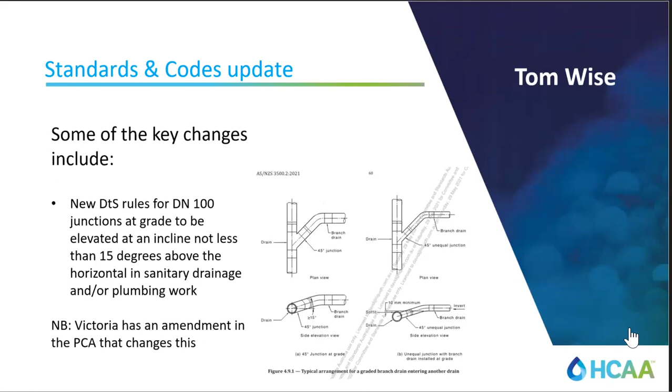So what was this one? So this talks to the fact that the 2021 deemed to satisfy are now in. And one of the major changes in ground is that there's an informative section that talks to soil classifications as we move into class 1 buildings in reactive P class and H1 type soils. And so there's a good bit of guidance there as to what a suitable installation looks like. But of course, make sure the hydrogeotech or the geotech is involved in those designs.

To account for bushfire prone areas as we build in more unique locations, the bushfire standard has now been referenced under each section of the PCA. The performance-based design and installation must now meet the ABCB guidelines. So instead of just producing a performance-based report now, there's a consultation process that needs to occur, which is a simple paper where you just identify the stakeholders and the reasoning for the performance-based solution, circulate that, wait for a little while, and then issue the report.

So if you're using performance-based solutions for stormwater drainage systems, the PCA people will be onto that, but I'm not too sure how long it'll take Fair Trading to catch up. So mark you as well, on our website at the moment the consultation document isn't there, but we might get a template up fairly shortly.

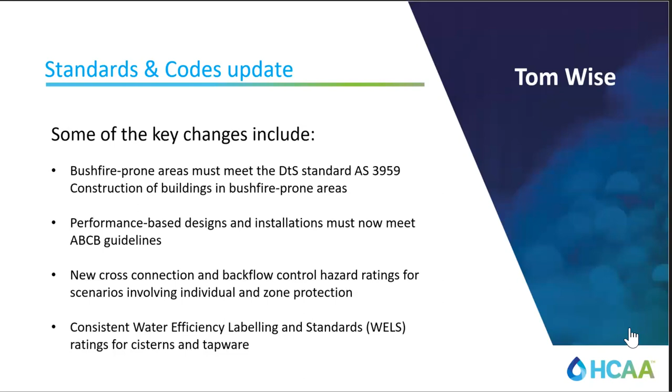Cross connections, so there's now a new risk rating method. Backflow has been made a matter of public interest, so elevated from the deemed to satisfy into the PCA. So there's probably process changes, but maybe the outcome isn't exactly what it might have been before. So then, of course, WELS labelling schemes and that type of stuff as well. So of course, plumbing works needs to comply with the BCA and PCA. And then, of course, 1st of May.

So generically across Australia's states and territories, if you've already obtained a building approval or CC, that has already set the PCA for your project. But of course, check which one is applicable. And of course, variations to buildings and designs add some terrible complexities to that. For Victoria, there's a few different things that they've added in to suit their local conditions. One of them is making changes to the 15-degree junction, and of course that sits at the back of the PCA in relation to state and territory variations.

So, like Paul said, it should be easy to find the PCA on the Building Codes website. It costs nothing. You can download a PDF which doesn't go green, which is very pleasant to use. And hopefully that was a helpful summary.

Has anyone got any comments or want to discuss any issues that they discovered, or is everyone okay? Cool. Good, we'll keep moving on.

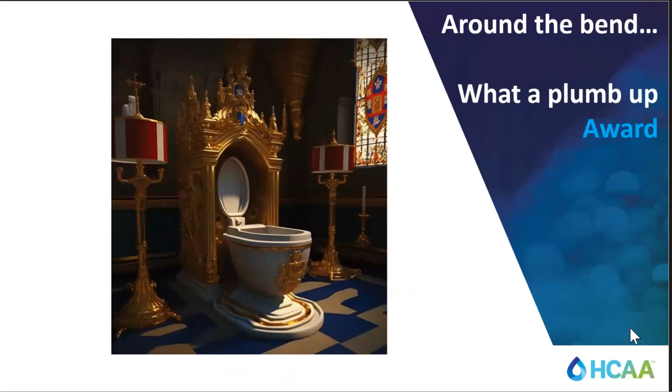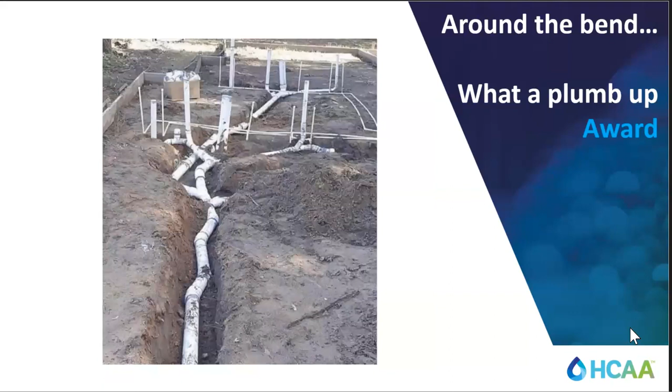Alrighty, we're on to the funny pictures. So we put this one up, obviously because of the coronation recently, but it's the main throne there. What do you make of that? Look at that for a sec. What can you see there, or what can't you see there? No ball, yeah, correct. What can you see in that one? Yeah, exactly. That's pretty nifty, what do you think?

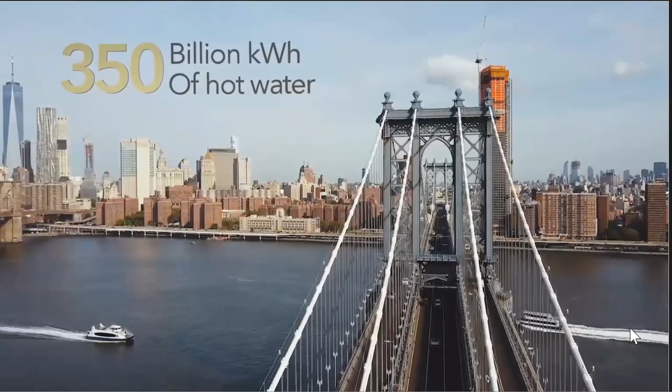In the world, every year, a total of 938 trillion liters of sewage heated at 16 degrees Celsius is discarded into our waters. In the United States, 350 billion kilowatt hours worth of hot water is discarded annually. This is enough energy to melt 3.77 billion tons of ice, the same weight as 11,000 Empire State Buildings. When ocean temperatures rise, surface water can more easily dissipate into vapor, creating the potential for more frequent and stronger tropical storms. Warmer temperatures will also lead to the melting of the polar ice sheets, causing sea levels to rise and damaging coastal communities and habitats.

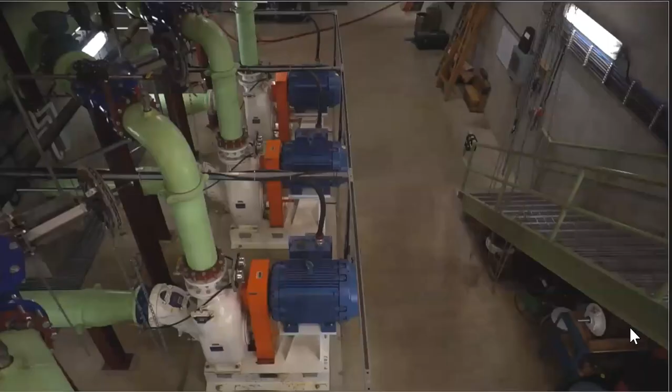There's a tidal wave right now of trying to live more sustainable lives by recapturing heat from wastewater. Innovative, creative people are putting together how we can become sustainable cities, reducing greenhouse gas emissions, changing the kind of energy we're used to using in the last century. All around the world, cities and countries are developing ways to reduce their thermal energy footprint and harness the power of wastewater. In Vancouver, Canada, each day, about 100 million gallons of wastewater flows through the facility at the Southeast False Creek Neighbourhood Energy Utility. The plant uses thermal energy captured from wastewater to provide heat and hot water to the community. When we first started it up in 2010, we served about one...

We'll just stop that there. Basically what we're going to talk about here is this equipment I'm working with the guys in Canada on trying to bring into Australia. The company is called SHARC Energy, and my company here is called Hydraulic Solutions by Design. So I'm here to complement you guys, not to compete with you guys. I'm here to help you guys to bring this renewable energy into Australia. So if you need any help, don't hesitate to contact me. I'm on the LinkedIn group with HCAA.

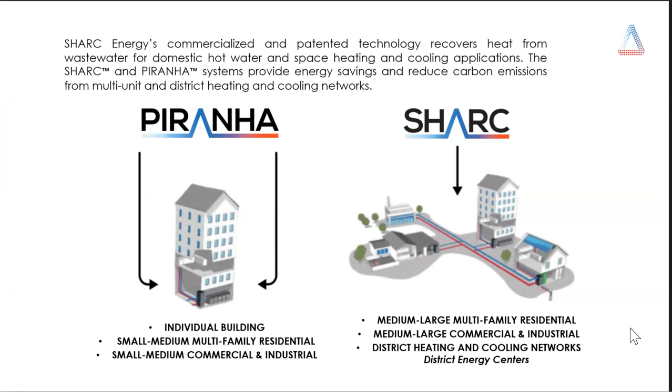The product basically does district thermal energy applications, which is the SHARC, which I'm working on at the moment in some projects in Canberra, and also does buildings on their own, which is the Piranha, which can do hot water systems for the buildings on their own. So just running through this quickly, that's the Piranha. We've got one of those in Canberra at the moment at a nursing home, aged care facility. It picks up the sewer from 200 independent living units and an aged care facility, and it basically collects the wastewater, grabs the heat out of the wastewater and preheats the cold water to create hot water. 80% reduction in energy and about a 3-year payback in return on investment.

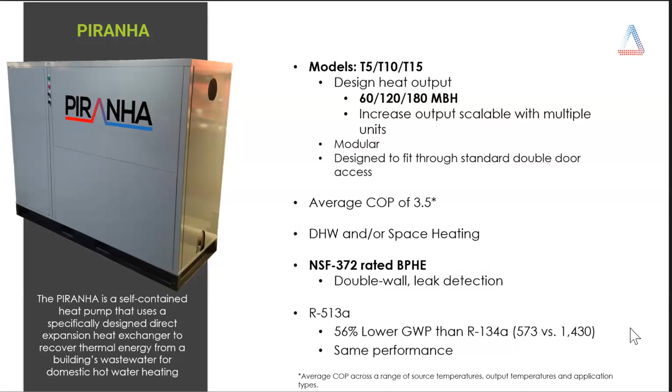I won't go through all these in detail. That's how they work. Emily might be able to have them there ready to give you later if you need them. And then we have the SHARC, which is used for industrial, commercial and larger precinct sites.

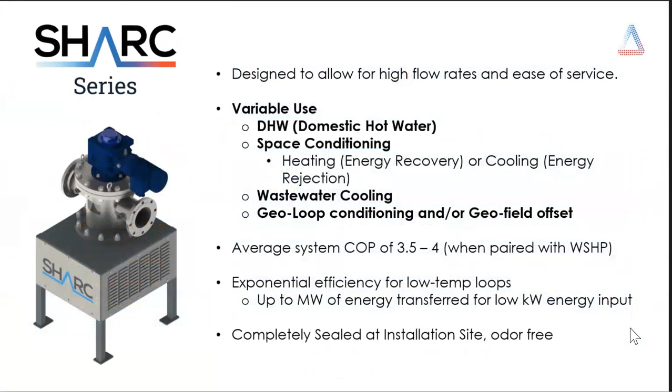Which basically filters the sewer down to a fine 3mm size, goes through a heat exchanger, and then we're doing one in Canberra with 1,000 dwellings where we're sending 20-degree ambient water in the whole precinct, and that is basically providing us with hot water via water-to-water heat pumps that are provided by Stiebel Eltron, and we use the Rheem tanks for preheat water. So it's basically like a geothermal heat source, but we don't have to put a bore field in.

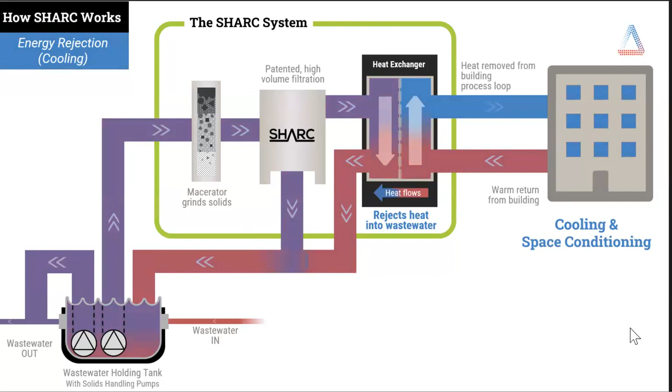So I won't go through all those slides, but you can actually add a bore field into it if you need to add more or less energy.

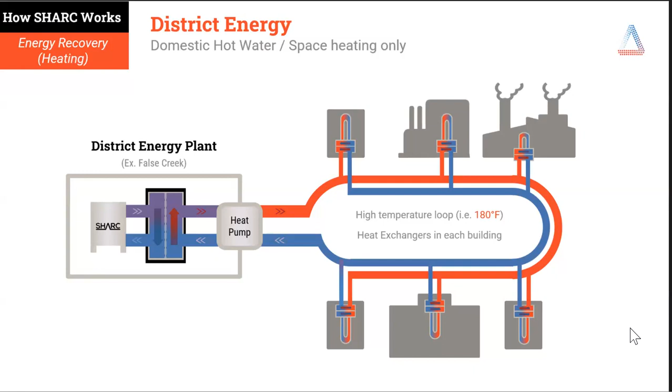That's a great example of innovation. I'm going to skip through some slides, so bear with me for a sec. But it's not a new technology, is it, Brad? It's been on the go for a long time in Europe and in the US and Canada.

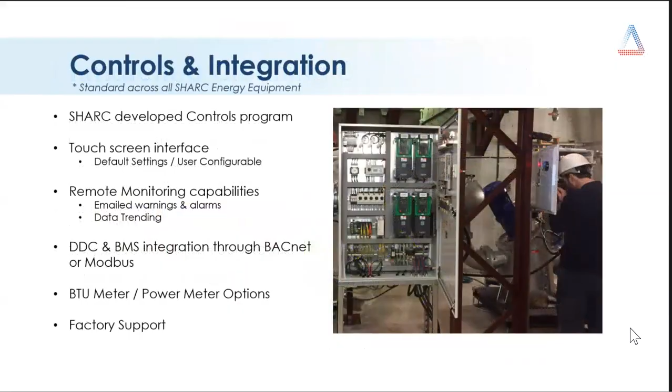There we go. Last slide. Happy days. Okay. We're on to our Aaron Cortese, who's going to do a wee presentation on the material that you're seeing here. So please welcome Aaron.

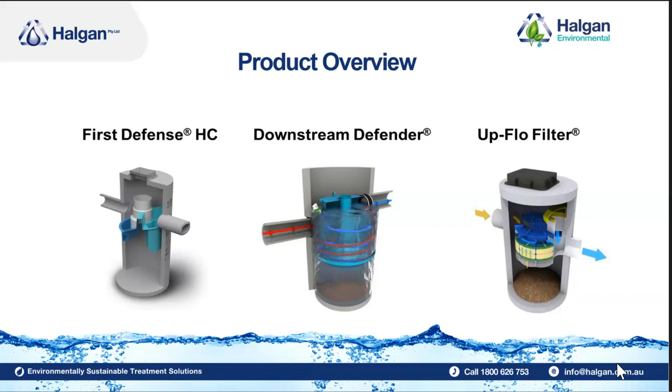So keeping with the traditions of Halgan's products, Halgan manufactures in polyethylene and HDPE. So while some of these products around the world might be featured in concrete vessels or fiberglass, we're going the lightweight option of manufacturing them in PE or HDPE. So essentially it's Hydro International's technology in our vessels.

So these could be in all different configurations. They could be vertical vessels or horizontal, depending on the application. And in some cases, which we can touch on at your leisure, they can be installed in larger OSD applications as well. So without mentioning some of our competitor friends, you may be used to some of these cartridge systems, where you might have OSD vessels with multiple cartridges. We'd be using this Up-Flo treatment system, as you can see there. Not sure how I'm going for time there, but we'll.

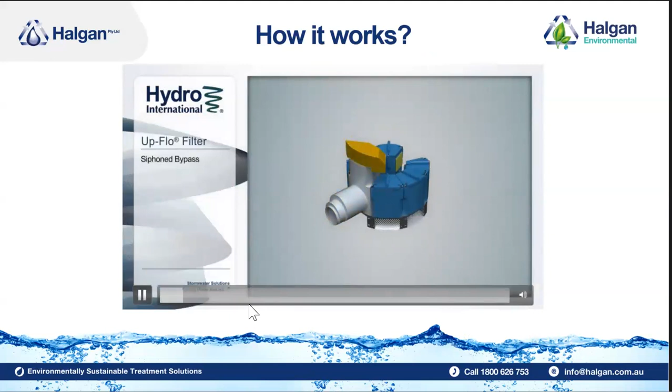Okay, so depending on the catchment size and whatnot is depending what model is proposed. So again, the catchment size, pipe sizes, flow rates, and more particularly, council's water quality objectives would dictate what type of vessel is used there or how many segments. So

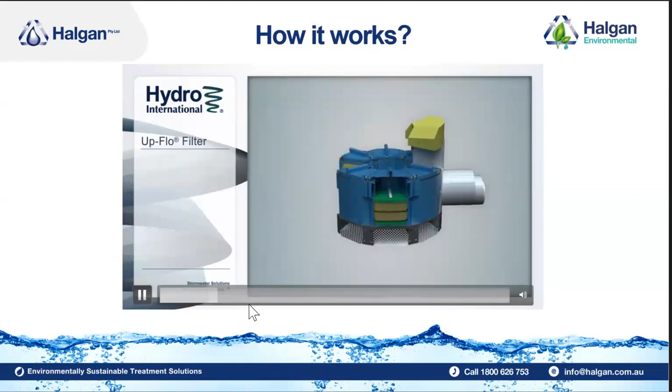As you can see there, similar to the product that's over here, that is the Halgan upflow filter, or the HUF as we like to call it. Each one of those modules treats 1.6 litres a second. So again, depending on what the catchment requirements are or council's objectives are, would suggest how many filter modules might be on in that particular device.

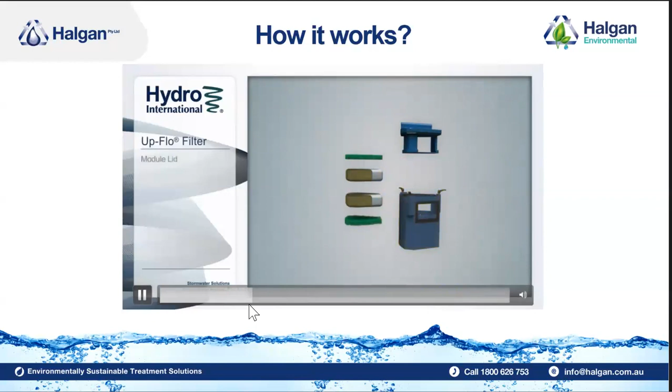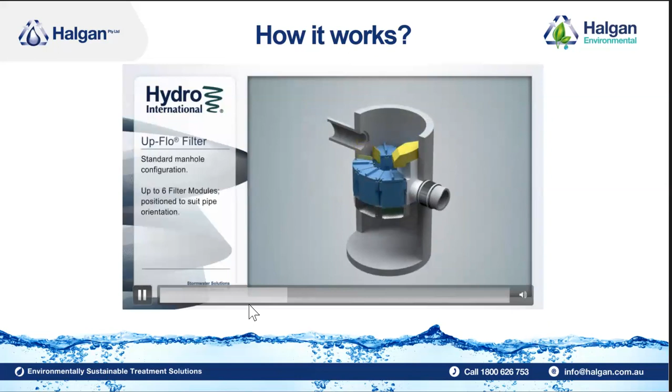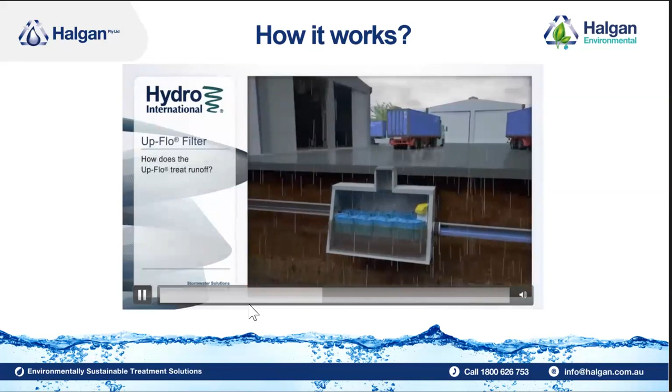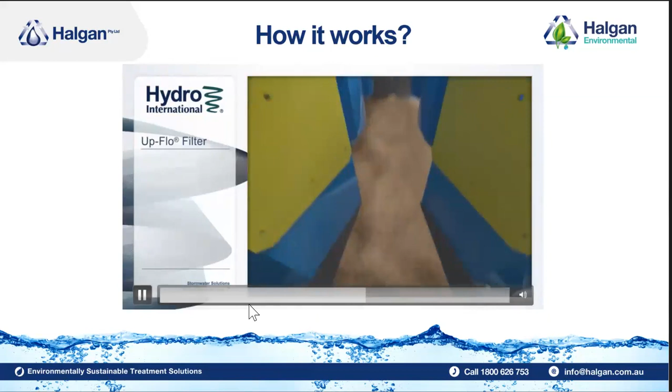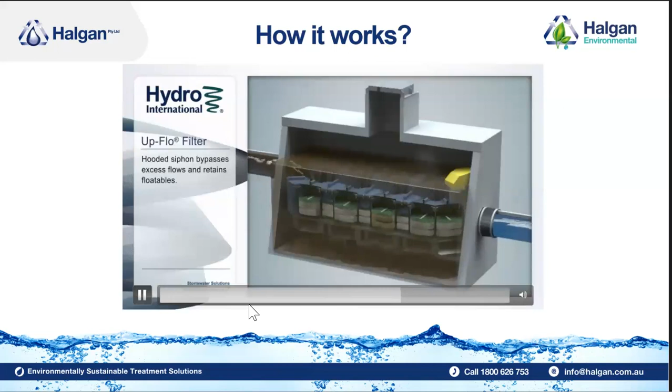So again, what's the suitable application for this? Well, with most developments, we understand that council, and we agree with as well, there'd be opportunities where they'd be trying to use what I would call green infrastructure, so biobasins, sediment basins, etc. But of course, subject to the spatial requirements, they might not be possible. In which case, having one of these vessels under the ground can treat with the same sort of capabilities without impacting the spatial areas where, again, it's valuable real estate. So it's horses for courses, and in many applications that I see, you might have biobasins, tree pits, and you'd also have gross pollutant traps or upflow filters such as these.

I'm probably getting pretty close to my time already, but I'll carry on until I get the wind up.

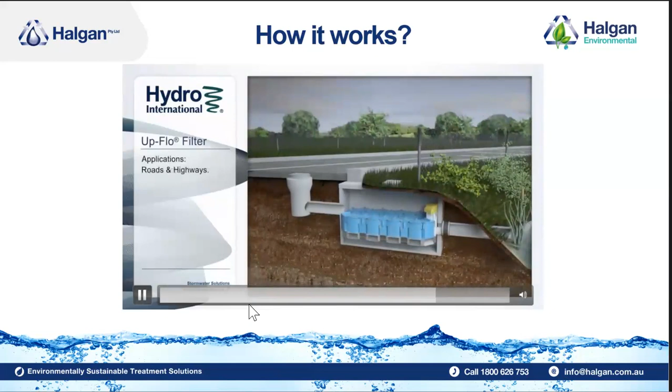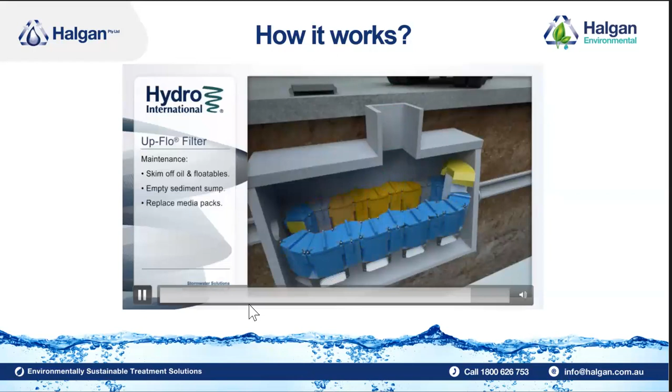So look, maintenance with these is similar to most, whereas the added advantage of this, which I think you're about to see here now, is it's maintained from the surface periodically by vacuum trucks. And then as required, on average every 2 years, those filter packs would be exchanged. So a lot easier on the back than most. Those media cartridges are essentially about 15 kilos wet, as opposed to some of the bigger cartridges you might be familiar with.

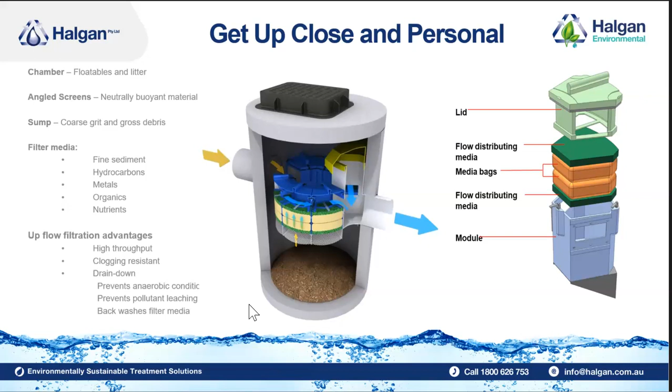So look, without dragging on too much, feel free to get up close and personal a little bit later on. We can have a chat about that particular product in general. There's several others that we can also discuss as well. And if you can't remember the name of the product, like Paul didn't quite remember my name, that's fine as well. So our product's the HUFF, but if you forget my beautiful face, well, you can always remember his. Thanks very much.

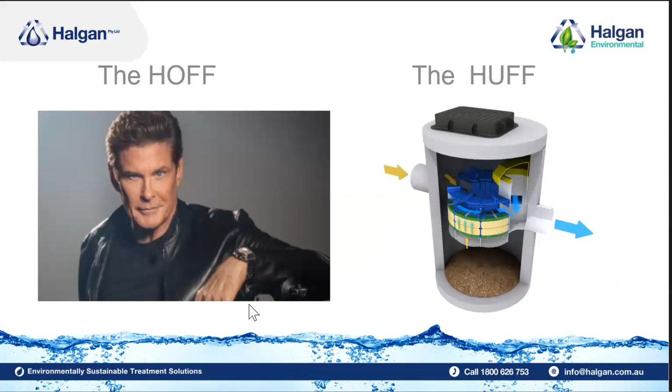Fantastic, well done, mate. No expense spared on the videos as well, eh? Really cool. Well done. And thanks for taking the liberty to bring all these pieces of equipment as well. Alrighty, so you have a question?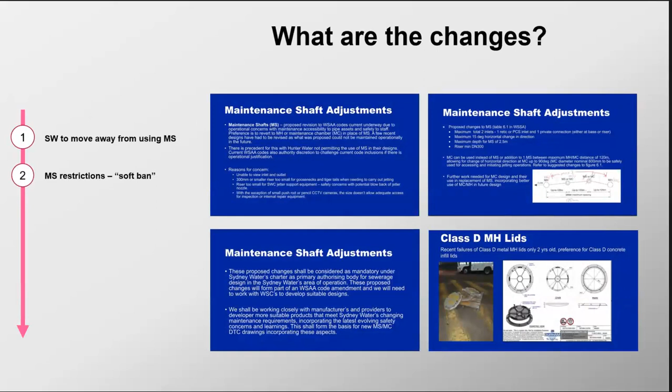They will be moving towards maintenance chambers. That's a 600 mil chamber. And that's in place of a maintenance shaft and actually in place of maintenance holes in some instances. The spacing has been tweaked a little bit as well, without going into too much detail about that. And also they're looking to maybe change the type of covers that are being used as well.

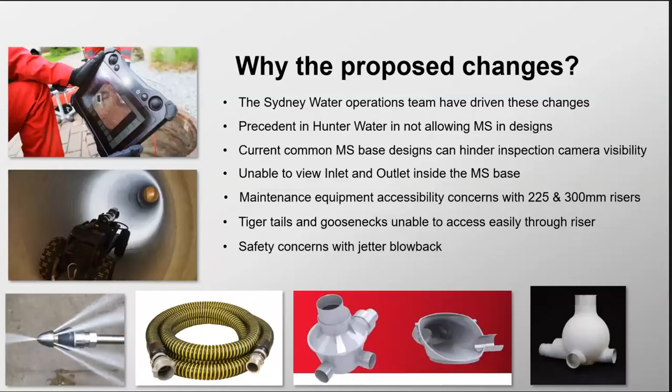So, which brings us to the range, the Awashaft range, and you can see we've got a family of structures there. Starting with our DN1000 maintenance hole. And you can see here we've got preset base types. Now, this is a departure away from the traditional systems, which are either cast in situ or have set angles that can be called upon to be made.

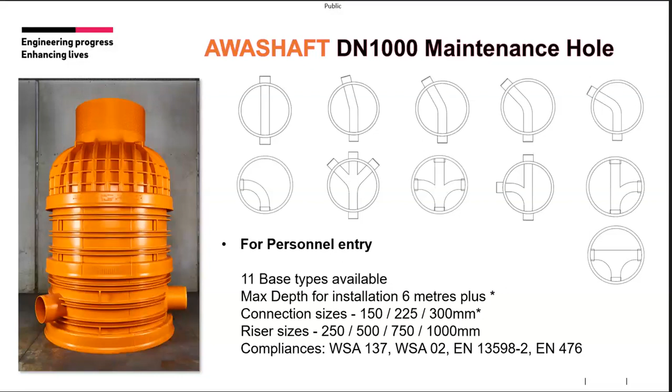We have a hybrid 800, which is in between the maintenance chamber and the 1000. Now, this is a pretty cool concept that we have for relining a degraded gas-attacked maintenance hole. So that's designed to re-sleeve and permanently reline a maintenance hole, a 1000 maintenance hole. The voids between the new parts and the old chamber would be filled with a quickset cement. I won't bore you with too many slides on that, but it's one to keep in mind for reline renovation.

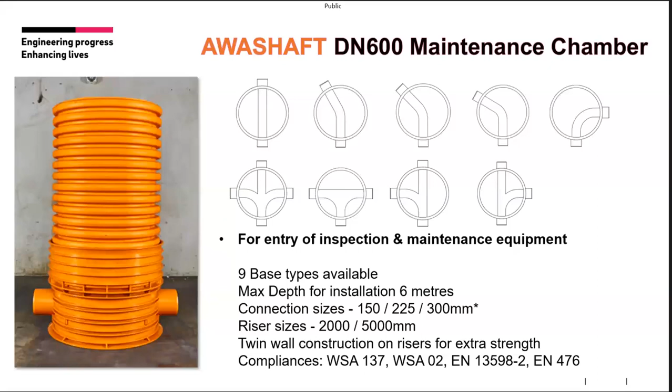600 maintenance chamber. This is the one that's making some pretty big appearances now in the Sydney Water network. I've been attending quite a few installations. I have also been lucky enough to do a lot of the plans and talking to a lot of consultants about these. I've learned a lot in the last few months about what they're capable of and how they work. And a lot of the contractors as well have been on a bit of a learning curve with these. So as you can see there, 9 preset base types, and we've got a couple of riser sizes, but I'll get into a little bit of that as we move on.

Our poor forgotten child there, the maintenance shaft is probably going to go the way of the dinosaur now. The junction one specifically; the straight through could still be used up to 2.5 meters deep and up to 15 degrees deflection. But in Sydney Water, those junction bases are now fairly well obsolete. We also do a TMS, obviously, for where the line terminates.

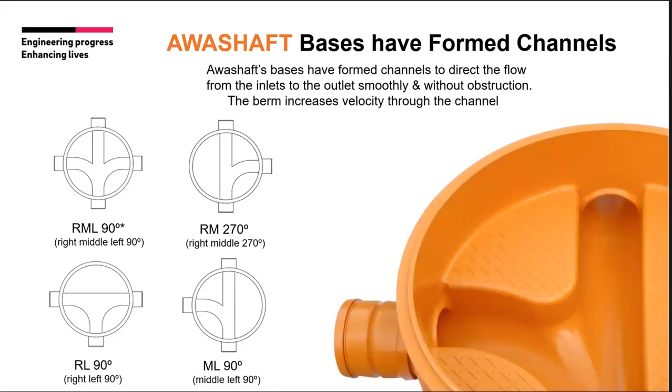So our shafts have formed channels, as you can see. It's interesting to note there's a berm there between the channels, and that's there to help increase the velocity, similar to a Venturi, I suppose, and hydraulically, they work very well. We have 0% fall in our bases, which is also quite a big departure away from traditional maintenance holes, which have 30 to 50 mils fall in them. And the concrete structures need that because of their porous and grabby nature, whereas ours are more or less Teflon coated, if you like.

So what happens if you need an angle that's not exactly what we have in the product book? Well, we've got a bit of an ace up our sleeve with the ball joints. We're not the only ones on the market that have this concept, but ours is sort of an optional add-on that we can put on. You don't necessarily have to use them. But if you've got incoming grades or horizontal deflections, those ball joints can allow for 7.5 degrees horizontal deflection and up to 13% grades up or down. So it gives plenty of variation.

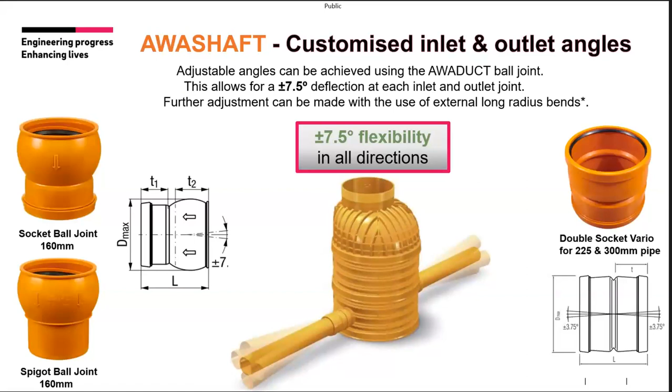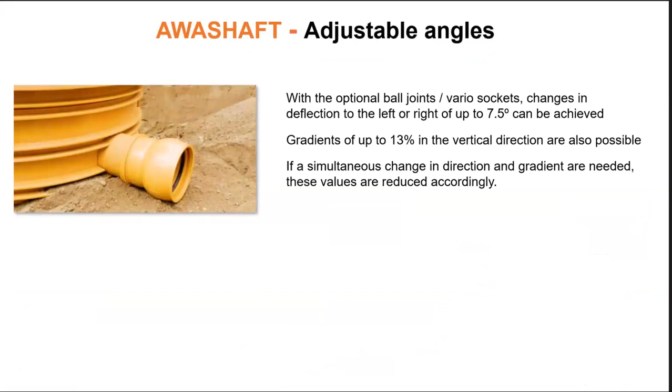So you'll notice on the maintenance holes, we had straight through 15, 30, 45, 60, and so on. Those ball joints allow you to catch any angle infinitely in between those. That's pretty much how it works. You can see there that the bedding's been set down, the base is in place, the socketed ball joint on there, and the pipe deflecting away. I do have a sample on the table if you wanted to have a bit of a play with that. And you can see there the outgoing grade.

So it allows for plenty of flexibility, and the contractors, although a little bit baffled initially how they were going to make it work, as soon as they had a go with it, they were quite impressed with the amount of flexibility, because every trench you open is going to be a bit of a Pandora's box. You don't know what you're going to find.

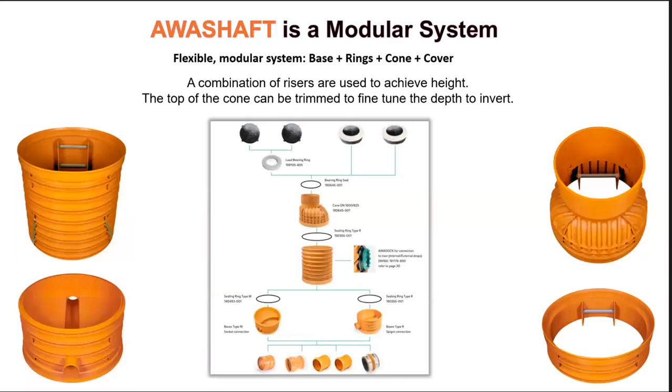So it is a modular system. As you can see there, base, risers in different configurations, and the cone. So it's rubber ring jointed, and these are designed to be completely watertight and set for 100 years once you've got those in. Also, at the top of that cone, that area there can be cut up to 250 mils. So you can get really fine adjustments there before your concrete lid's placed on top.

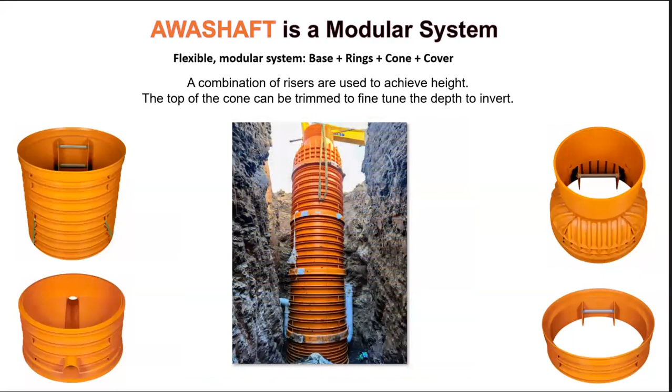And that there's a 4.5 metre installation up in the Hunter region. We've been operating pretty successfully up there for about 5 years, Steve, maybe 5 years in Hunter Water. So we're doing really well in the subdivision space up there. You can see how the components work.

Same with the 600, it's probably even a little bit more simple. Base, riser and cover: select your base type, 2 or 5 metre riser, which is then cut by hand, could be a hand saw, reciprocating saw, something to that effect. And then just a B or D class cover. So it's a bit of a Lego set, if I was going to simplify it. All rubber ring jointed, no welding, no gluing. So it's a real flexible and fast system.

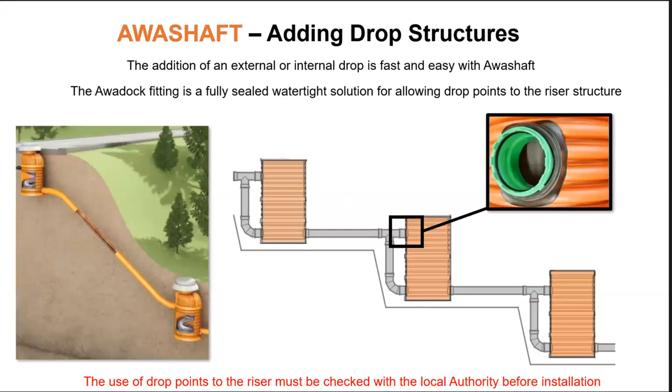If you've got external drops coming in, high level drops, we do have a solution for that as well. Obviously, it's a bit of a simplified photo there, but we have a fitting called the Awadock. And with that, you can simply core a hole in the side of your riser and add that rubber seal, and then simply screw in the green fitting. That can be anywhere on that vertical axis. It may be an external drop or an internal drop. We can do both. So you can see here, that's basically how the fitting looks.

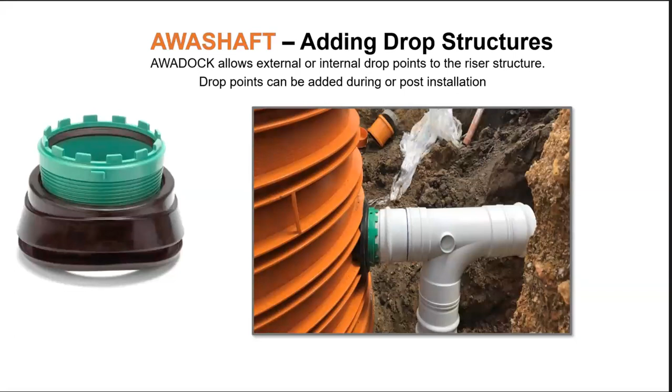And again, I do have the fittings on the table, so I encourage you to have a bit of a look. Some simple tools, just a 200 mil hole saw for this particular fitting, and a clock face wrench, which is used to wind that conical fitting into that rubber seal. There you can see the drop junction and the external drop headed down to that inlet at the base. And that was again from one of our installers up there in Newcastle, sporting a lovely Rehau hat. And you can see the external drop, and you can see the utilisation of ball joints there as well. And for the 600, you could potentially have multiple incoming drops as well, anywhere along that vertical axis.

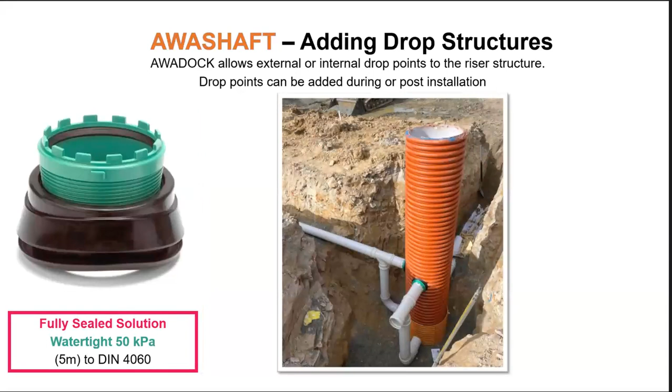So AWASHAFT is 100% permanently leak proof. It's brilliantly engineered in the way that seal is encased and caged in that polypropylene housing. So what that means is that the seals are completely load independent, so that the rubber seals never get stressed like you would see in a traditional setup.

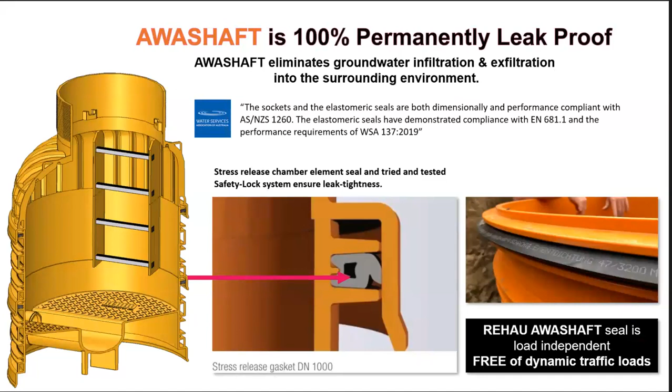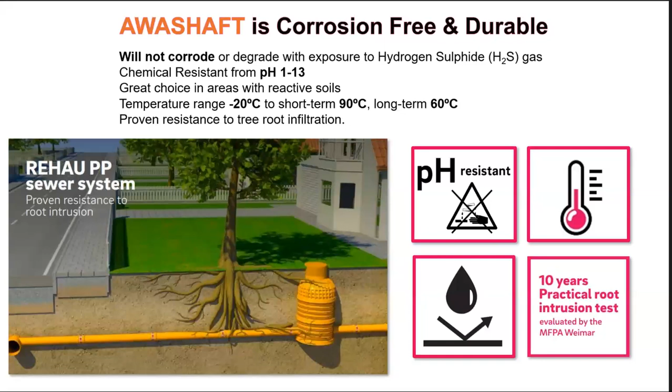The material itself, polypropylene, lends itself really well into these systems because it is highly resistant to chemical attack. pH 1 to pH 13 is a pretty amazing range. Temperature resistance there, pretty good as well. And compared to the traditional concrete structures, it's pretty well impervious to the H2S gases that we see. And if you have areas with reactive soils, and there's plenty of that around the state, then obviously this is a pretty good choice as well.

So one of the questions we get all the time is, well, is it plastic? Is it going to float away? Because we all know that trying to push a beach ball down into water will result in it smacking you in the face, otherwise known as the Archimedes principle. There you go, Matt, I used it again.

But the way we combat that is with the correct compaction, and it holds onto those horizontal ribs and it's effectively locked into place. So you can install an AWASHAFT in 5 metres of groundwater from the pipe invert upwards without any dramas at all. No concrete base needed, no encasement, no stabilised sand. You can use it if you really feel that way inclined, but it's not a requirement.

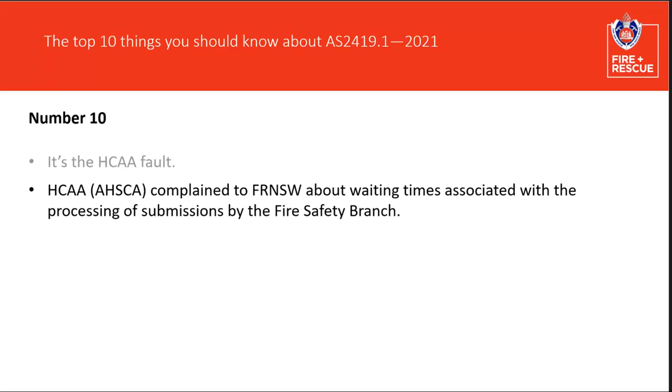What I've learned over the long period of time I've now sat on a standard: as soon as you write a rule, you create other problems. So we've probably still got the same problems, but we've tried to solve a lot of the problems associated with 2005. So that was number 10. So it gets more exciting from here. All right. On number 10 continued, sorry. I just like saying that. It's the HCAA's fault, all right? I just loved it. And the following 9 top points are, it's the AHSCA's fault. All right. Okay.

Number 9, some early concerns from the Hydraulics Consultants Association of Australia. So Em sent me some questions. So I put them up there. My comments are in red. So someone said, do all the jobs with boosters require a private or fire service pumping appliance to come and do pressure and flow testing of the system, or are there other options?

I said, commissioning requirements have to be complied with, and they were supposed to be complied with in 2005. Probably weren't, but how this is achieved is up to the design team. If you can get someone to prove your design meets all your performance requirements, 20 litres a second at the hydraulically most disadvantaged hydrant, that's up to you. Fire and Rescue New South Wales do not undertake commissioning tests, so we can't get dragged into it. And the basic reason for that is they don't want to risk the legal obligations of blowing up systems.

Where a booster is installed, the system is to be boosted. It's one of the fundamental requirements in the back of the book. So there's an expectation from the fire services that the thing is tested and water's flowed through it and the hydraulically most disadvantaged hydrant performs in some way. And you get all that stuff in section 12 and the appendices S, T, and U.

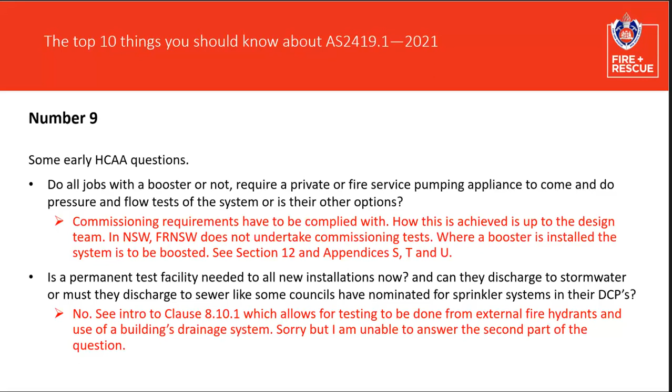Is that what DCP is? Well, whoever the person is asking, he's saying that some development control plans nominate the sprinkler systems to discharge to a sewer. So if it's a development control plan and it's not written that a hydrant system has to discharge to the sewer, then you probably don't have to, because sprinklers have got the black water stuff. There was some case law around these things.

Oh, can you hear? There's people on the Teams as well.

I'll repeat that. Discharging either of those, you're looking at 20 litres a second most of the time. Where's that going to discharge to? I'm saying, most of the time you have a sewer pump station. Sorry, you can't discharge more than 2 litres a second from a sewer pump station to city water. I understand that, Mark, that's fine. I'm not answering. All I'm saying is, we're trying to figure this one out.

So everyone knows, well, I've got 4 minutes, and this was just a primer. All right, I'm not here till 12 o'clock.

If it's a tank that isn't the primary water supply, a break tank, you don't have to put a large bore suction connection to it, because the break tank will be served by an H pattern or inline or tank model booster assembly, and that will allow the fire service to get to the primary water supply, which in this instance would be a town main. So the break tank's been installed because the authority having jurisdiction, the water agency, says your pumps can't draw off the town main. So you put a break tank on, we don't want access to it, because we can get access to the primary water supply, the town main, because of the hydrant system.

So the key point is you as a designer have to say what's the primary water supply, and that's the supply that's going to give the system 4 hours of supply. If it's a town main, fine. If it's a tank, we need a large bore suction connection. So first point. For buildings greater than 50 metres, as above, except where an H pattern or similar booster assembly is provided, then the town main can provide the required flow rate.

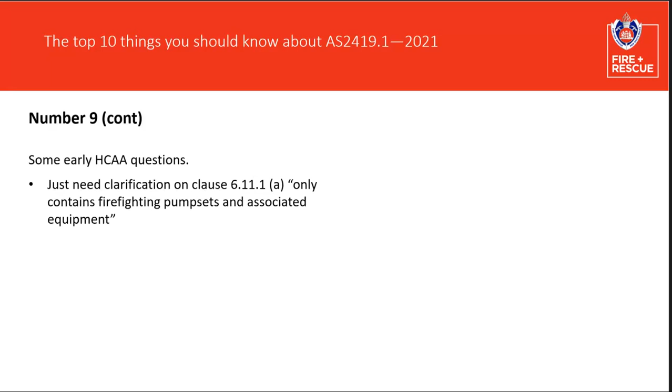There were a lot of questions from the HCAA. I'm going to go back to point number 9. Just need clarification on 6.11.1(a): only contains firefighting pump sets and associated equipment. So there's a statement in 611, which is about pump rooms, that says the phrase in semicolon, sorry. And I've said the response should be considered. These are the opinions of, not necessarily, Fire and Rescue New South Wales. I want to make that clarification straight away because we haven't discussed it. We do understand we're going to have to put some policy positions out, which will be on our website.

The requirements of 6.11 relate to a pump room for a hydrant system. So my first point is that AS 2419 2021 was written around a hydrant system. That's the first point I want to make. It's written around a hydrant system. Now, I'm going to cloud it up a bit as I go along.

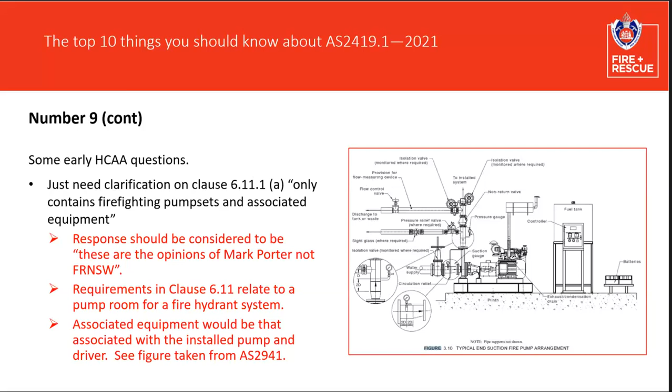Associated could be that associated with the installed pump and driver. So my interpretation of associated equipment for a pump room will be the stuff they show in 2941. There's the pump room, there's the pump and the associated equipment, fuel tanks, et cetera, right? Now, first of all, I'm not saying this is correct, but this is my interpretation of the text, and we can drag Dave Woods in at the end or at this point in time. So just need clarification on this.

Clause 811 of 2118 indicates that a sprinkler control assembly may be installed in a room readily accessible to the fire brigades. Now, the first point I want to make is, what does readily accessible mean? One of the things the ABCB beat up 2419 about was subjective sentences like this. Readily accessible to the fire brigades. Does that mean we could find the pump room in the far corner of this room because we could potentially walk in the main entry, walk up some stairs and come whatever? So I suspect in the next draft of 2118 part 1, AFAC will be saying, clarify this. What does it mean? But at the moment, 2118 part 1 says it can be installed in a room, any room.

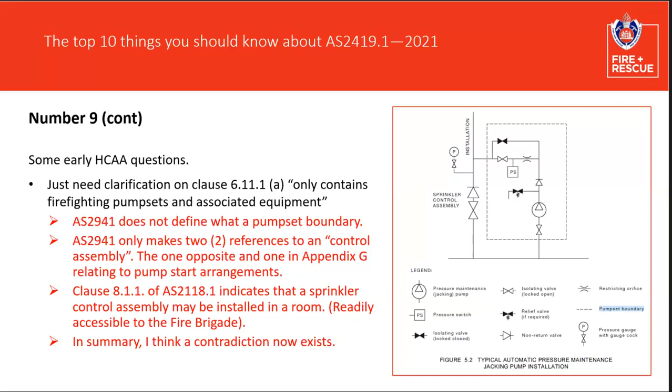Well, that's the point I've tried to make. We've written around a hydrant code, but the sprinkler standard, because it says a room, if they put it in a pump room, does it now contradict 2419 part 1? That's the question they were essentially leading me to. So I think there's probably a contradiction, but something for you to discuss further, because I'm sure certifiers are going to raise this down the track. So apologies for the stress.

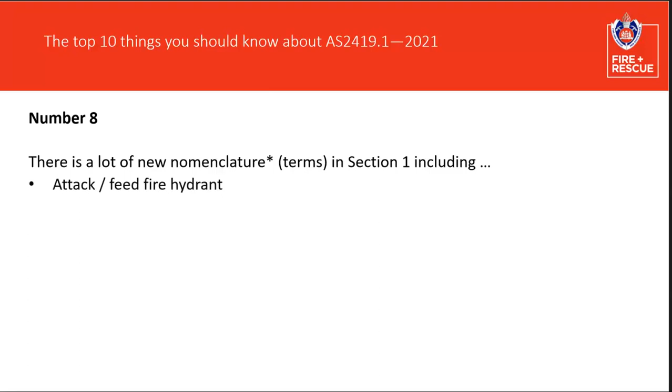Number 8, there's a lot of new nomenclature. I only typed that to see if I could say it. Terms in section 1, including, now, one of the points I'm going to stress is if you look in 2419, 2021, there is a whole heap more definitions.

One of the fundamental problems with the standards is people have different interpretations of words that aren't defined. So one of the things we tried to do was remove some ambiguity. So before you read the document, have a look at all the definitions. So those ones there, attack and feed is just an attack hydrant downstream of a booster assembly within 20 meters of a hard stand. You can get a concession in regards to flow.

Pressure, sorry, not flow. Full and half duty pumps just mean 10 litre a second and 5 litre a second pumps. Primary and secondary water supplies mean the primary one is 4 hours and the secondary supply would be something that's going to provide infill. So the classic one would be if you had an on-site tank that serves as the primary water supply and the town main's providing inflow to it, the tank is your primary supply and the town main is the secondary.

And that's how you should read the language. So it's all about the primary supply. We were trying to say to industry, the body of water that is providing the 4 hours of flow, that's the primary supply. That's what all the stuff relates to.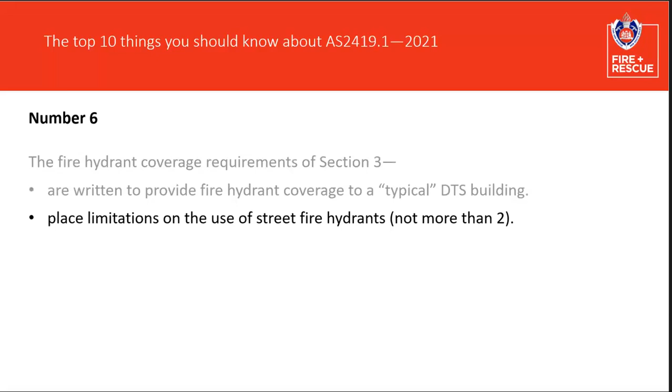Number 6. So essentially the hydrant coverage requirements are written for a typical DTS building, not one that has extended travel distance, because that's performance. It was all about the ABCB said, we need a set of rules for a DTS building. So it's written around DTS. It places limitations on the use of street hydrants and feed hydrants to some degree, but for street hydrants, not more than 2. And places limitations on fire hydrant coverage from a fire brigade pumping appliance fed from an external fire hydrant or an external attack hydrant.

So the rule basically says if you've got an external hydrant and you're doing coverage, you've got to cover all of the building. So if it's a 3-level building and you put 4 hydrants around it, you've got to get coverage to all parts of the top floor. If you can't get coverage to the top floor, it says you can only use those hydrants to do the ground floor and the one below. It's basically what it says.

So the changes were also to get consistency across design for fireys. So if you turn up and you've got external hydrants, you look at a building and go, well, they should cover the whole floor, the whole building, or just the ground. So it includes method of measurement rules, single distance from internal fire hydrant or external fire hydrant. So there's no more 60 plus 10, 1 metre in a room, et cetera. Now, there's a whole heap of reasons for them, but I want you to consider this.

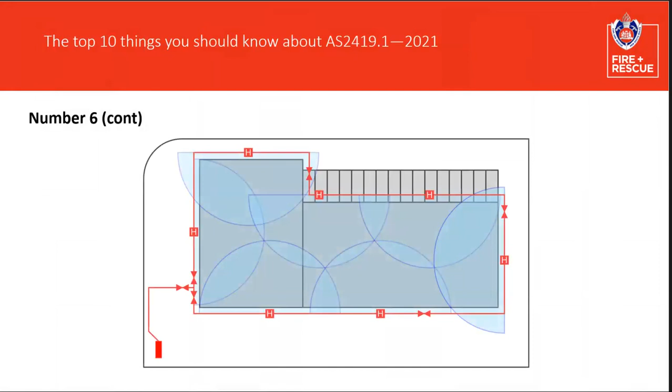Okay, this is the large isolated building with hydrant coverage, 60 plus 10, all parts of the building protected, happy days. Now, I want you to consider this. Here's what happens when a fire occurs. If we look at this building, the area that was protected by the hydrant in the top, we would not use that hydrant. So the hydrant you've put in the building to protect that area, we ain't touching it. No way. So that's out.

So you look over here and you go, maybe we could use the one on the left, on the vertical pipe, or one of these on the bottom side. Now that means we're not running 2 lengths of hose. We're running 3 or 4, and this is for a deemed to satisfy building with supposedly deemed to satisfy travel distances that we can get 60 plus 10. What industry has never considered is the implication of a fire in the building.

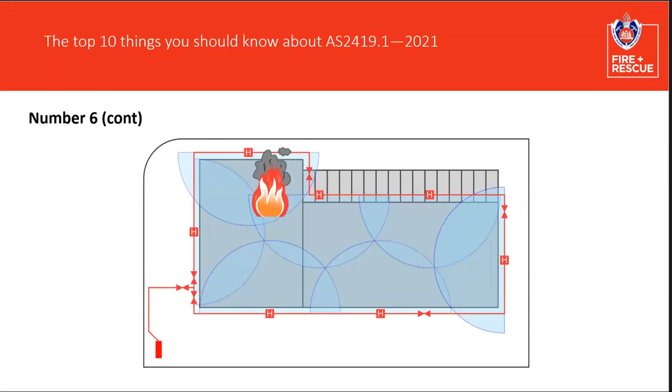So I want you to think about that when you go to the fire services and say, we want another length of hose, or we want another 40 metres. No, what you're saying is, you want us to use the hydrant on the other side of the building and run a squillion lengths. It's never, ever considered. So let's look at the next one. So the point I'm trying to make is the hydrant coverage rules are just about the distribution of hydrants around a building. They're not actually about how we may use them. However, I think industry believes that's what we do.

Now, here's one where we've got a couple of external hydrants protecting a low rise building, and they meet at the upper level, 60 plus 10, coverage to all parts of the floor, easy peasy. We put a fire in the building. We are not using the external hydrant that's covering that half of the building, because the golden rule in firefighting is you go from the bit that's not burnt to the bit that is burnt. So if we went up the stair where this fire was and started squirting water on it, all we would do is drive it across the floor. So we go up the other side. We don't use 2 lengths of hose. We use 3 or maybe 4.

So what I hope you take away is it's never just how you put them, it's how they're going to be used. Hydrant coverage rules distribute a whole heap of hydrants around the building. But when you put a fire in there, in the majority of cases, we won't be using the one that protects the bit that you're saying it protects. So, important point.

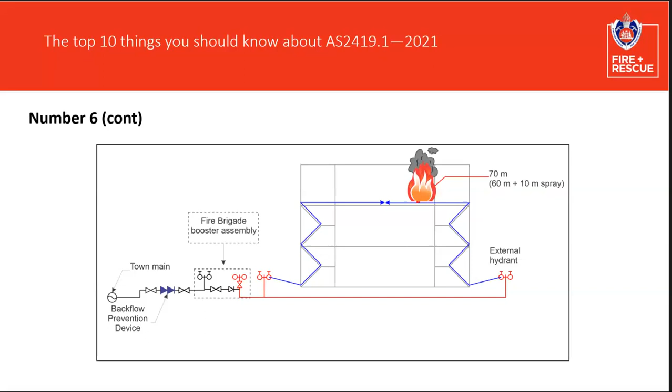One of the things I've seen over the last X amount of years is a below ground tank that we've got no chance getting water out of. So if you look in clause 4.4, there's some parameters around the maximum length of pipe work that should be installed. Now, I actually think below ground tanks bring with them a certain amount of certification risk over the longer time. So I think you should consider your options before you say, yep, we're putting a tank down here, because they may not be able to certify it either at commissioning or at some stage later, and then it's like, who is at fault? So there's a certain amount of risk with below ground tanks.

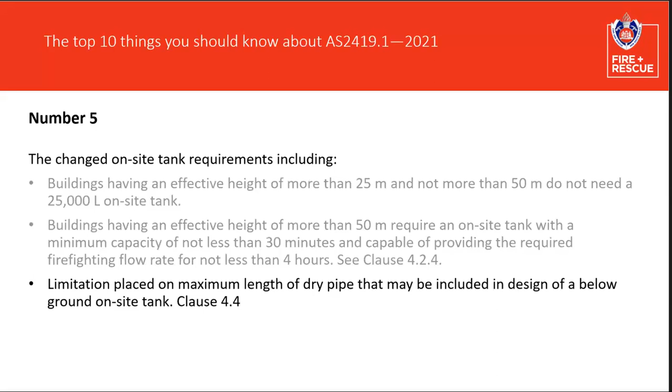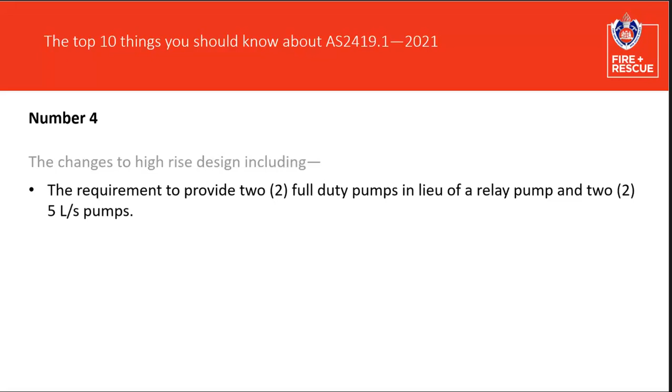Okay, changes to high rise, number 4. Required to provide 2 full duty pumps in lieu of a relay pump and 2 5-litre a second pumps. So the big change is we just want 2 thumping pumps that do 10 litres a second for the required number of hydrants, and they run for 4 hours. The requirement for the water supply serving to have no single point of failure. So when you look at the drawings in AS 2419, you'll see once you get from the tanks, it's all redundancy, ring mains, 2 pipes somewhere, so that we don't get a single point of failure in the design. The requirement for each full duty pump to run for 4 hours as part of the commissioning requirements.

Now, one of the interesting things when we're writing the standard is, we know the reason we wanted full duty pumps off a tank is to make it easier for industry to commission, because we know relay pumps rarely get serviced, don't get looked at. From a cost perspective, if you've got a relay pump and you're going to test it every month correctly, you've got to get some sort of pumping appliance to your building to run it. So it was all about trying to improve the redundancy or the performance of the on-site pumps.

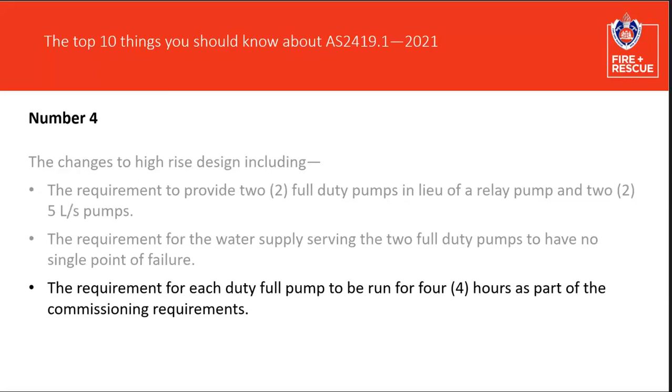So number 3, nearly there. Changes to the fire brigade booster assembly requirements. The interesting thing is if you read 2021, you'll notice there's no clause 7.4. Clause 7.4 of AS 2419 2005 just had a whole heap of requirements that you had to meet. And if you met those requirements, it didn't matter what your configuration looked like, you could put hand on your heart and say, yes, it meets all the separation, etc., happy days, you can sign it off. If you read 2021, it basically says there's probably 5 options. Your booster assembly should look like one of those. And if it doesn't, then you're probably not complying with the latest standard.

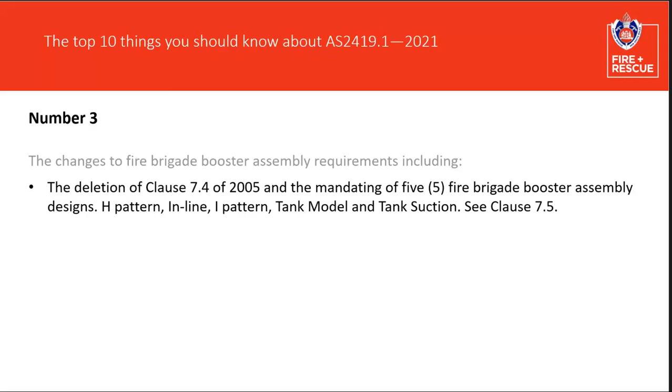So H pattern, inline, I pattern, tank model, and tank suction. Now, if you end up in section 7 and you look at a tank suction booster assembly, all it is is a tank with a large bore suction connection and boost inlets. And what we've basically said is that is still a booster assembly. That tank's providing 4 hours of water. We're taking it from there and putting it in there. So the requirements for boosters around location, et cetera, should apply. So have a look at those.

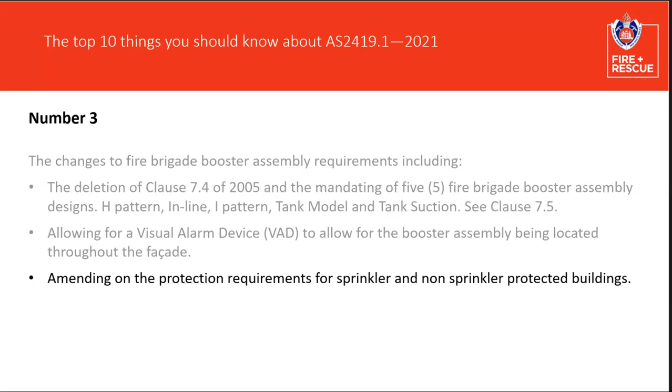Amending the protection requirements for sprinkler, non-sprinkler buildings. Oh, geez, thanks. Amending block plans. Now, number 2. Now, this is the excitement stage, all right? So we're now down to the top 2. I could feel the tension building. Is my clause going to be nominated?

So number 2, performance requirement EP1.3 of the NCC states, a fire hydrant system must be provided to the degree necessary to facilitate the needs of the fire brigade, appropriate to, not the developer, the fire brigades. When you look at a design, you should be saying, have I created a design that facilitates the needs of the fire brigades? Not the one that is the cheapest, not the one that puts the booster assembly in the worst spot that still complies with the DTS position, but facilitates the needs of the fire brigade. And then we've got firefighting operations, floor area, and the fire hazard. So you're supposed to meet that performance requirement under DTS.

Now, here's the interesting thing. This is the point I want to make. Vale Izabella Nash. There's a Queensland firefighter who died last week in a fire. She didn't experience the winter blast that Queensland are currently enduring. She's not going to see sunrises in 3 weeks, et cetera, et cetera. We do a dangerous job.

I was in the job about 12 months, went to a house fire. It was a 2-story building alight. We were the second arriving pump. I went in the door third. There was a hose line going up a red cedar stair. It was a flash house, up a red cedar stair, met a landing, went across. I ran up the stairs. I got to the top of the stairs. I looked across. Hose line had gone across the landing and the fire were in there. Between me and that door, the red cedar ceiling was alight. It was rolling. And I was like, taken aback.

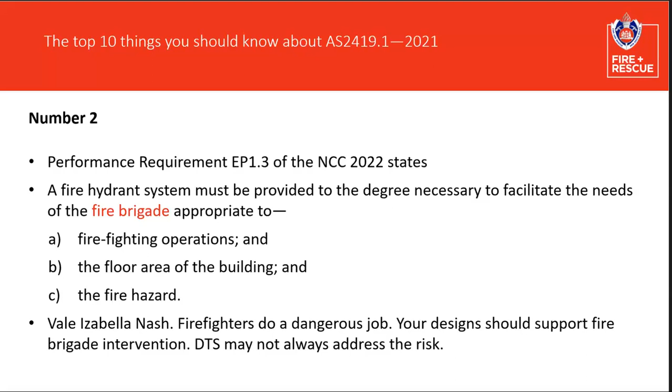But we do a dangerous job. There's young people going into buildings and it's quite spooky. So that's number 2. So just imagine what number 1 is. I'm really going to browbeat you. Okay, number 1. And the number 1 things are, yeah. Well, there's never been 1 point on all of them. You should seek to understand things 11 to 200 that we're not discussing in this presentation.